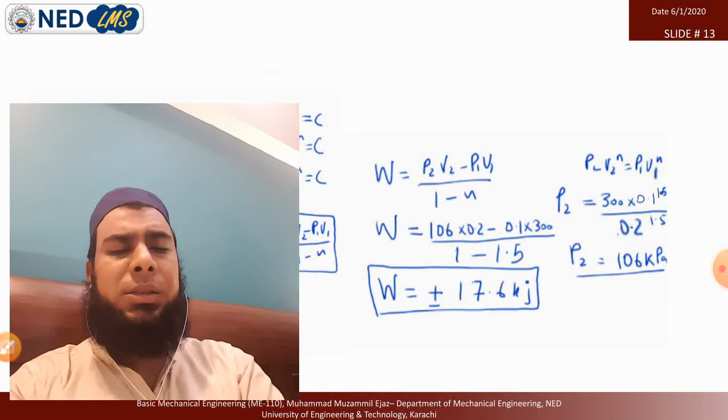In the denominator I wrote v1 and in the numerator I wrote the value of v2, but in the calculator I solved it in the correct manner. That's why I get the correct answer, and we successfully calculated the work, that is positive 17.6. It is positive 17.6. Negatives I just marked in the explanation, and you can see it in the video, so it's not a mistake.

So let's move towards our lecture 11-12. Today we will start with one small topic that is related to the ideal gas equation, and then we will solve one numerical, the last numerical of closed system, and after that we will study open system and then 1 to 2 numericals over there. Then we will move towards the refrigeration cycle.

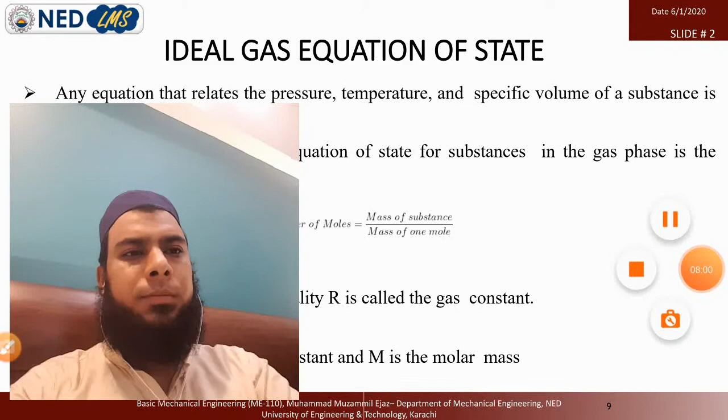Before doing this numerical, we will use the ideal gas equation PV = mRT, but in pre-engineering you studied this equation as PV = nRT. So here is the difference: why we are using PV = mRT and not nRT. We derive this equation in terms of mass. Basically, when we talk about the equation of state, any equation that relates pressure, temperature, and specific volume of a substance is called an equation of state.

We already solved the numericals of the PV^n = C polytropic process. This is also a compression or expansion process. It is also an equation of state, but joining all the properties in a single equation is called the equation of state.

The simplest and best known equation of state for substances in the gas phase is the ideal gas equation of state, PV = nRT. P is pressure, V is volume, n is the amount of gas, whether it is written in number of moles or in mass. Actually, in the below equation it is written as the amount of gas m, that is in kgs. R is the universal gas constant and T is temperature. It is the ideal gas equation and it is used for ideal gas only.

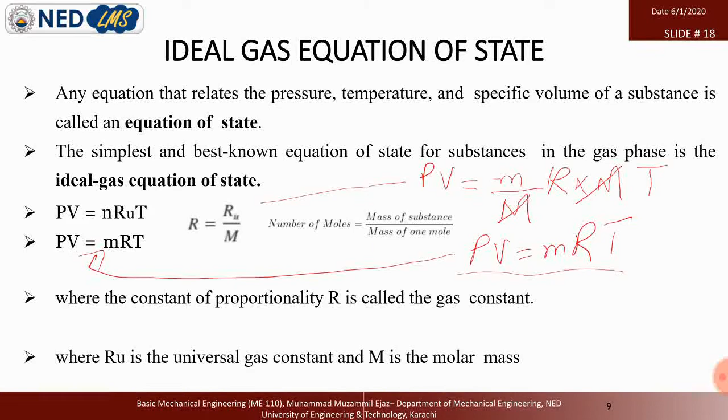So we move on. For the remaining numericals, whether for a closed system or open system, we will use this equation PV = mRT, and we will take the R value from the table for a particular gas, whether it is air, steam, or any other substance like nitrogen. Here R, the constant of proportionality, is called the gas constant, Ru is the universal gas constant, and M is the molar mass. So let's move on towards our numerical.

This is not an example, this is actually question 4.63 from the book of Cengel. You can get this question from the shared book. An insulated piston cylinder device contains 100 liters of air at 400 kilopascal and 25 degrees centigrade. A paddle wheel within the cylinder rotates until 15 kilojoules of work is done on the air while pressure is held constant. Determine the final temperature of air. Neglect any energy stored in the paddle wheel.

So it's a very simple numerical. The paddle wheel rotates. When the paddle wheel rotates, this fan is giving internal energy to the gas inside the cylinder, and due to this the temperature will increase. If the pressure is kept constant, then any energy provided to the system will increase the temperature of the air.

So this numerical, we have to solve this numerical. So we apply the same equation that we have studied for the closed system, that delta E is equal to Q minus W. Let's move towards the next one. So this is the previous numerical. I just move on to the new one.

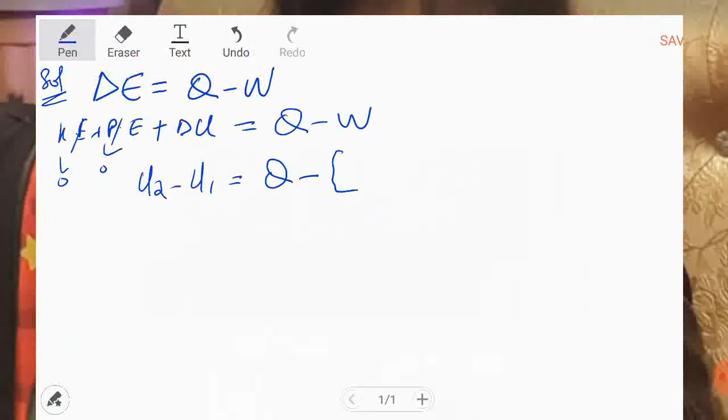so it is from the equation. When the Q is not given, you can get the idea from this point. It is an insulated piston cylinder device, means it is an isolated system. In an isolated system, the heat is not transferring from system to boundary, so there will be no heat transfer, so Q will be 0 in this state. So the Q will be 0, this is 0, and the work is split into two parts. One is work by the wheel, and another one is the pressure volume work.

So work is adding to the system, so anything added to the system, by the sign convention, it is opposite to the heat transfer. So we apply the negative sign. Paddle wheel, we write this with P, work of paddle wheel, it is the sign notation with negative sign. And pressure volume work is done by the system. It is work done by the system, so the sign convention will be opposite to it. So mechanical power we have Wm and positive. So by opening, this will be 0. This minus becomes plus paddle wheel power, and this becomes minus, and it is the work pressure delta V.

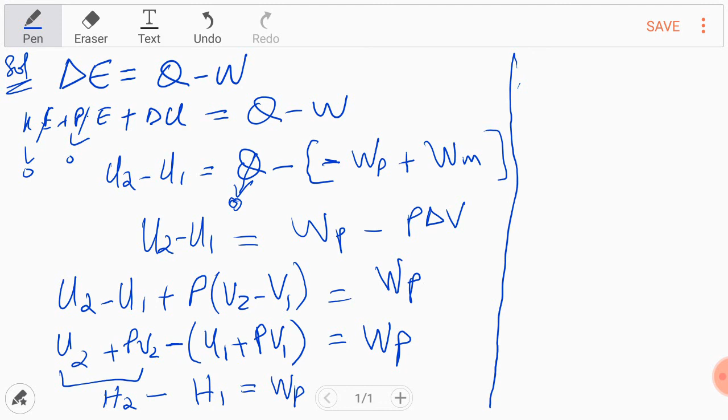internal energy plus pressure volume work is basically enthalpy. It is a combination of internal plus pressure volume work, so it becomes H1, and this is H2 minus H1. Again we can write this in the short form, M H2 minus H1 is equal to work P. So like in the steam we have enthalpy at constant pressure. In this example we have a working fluid here, so we also have a table of air which can give us the value of enthalpy at constant pressure, and in this numerical we have a pressure of

400 kilopascal. So we should write data over here, so we don't shift to the question again and again. So I just recommend you to start with the data. So we will find out H1 at 400 kilopascal, and by this formula we get the value of H2. So we can arrange this like this. M goes to here, and the bracket becomes open, so H2 minus H1 here, so when it goes toward there, it becomes H1.

Now H2. Now we just need to find out: we know the value of Wp is 15 kilojoules, volume 100 liters, so we can convert volume into mass simply by the density. So now we need to find out the mass of the air, and we can get the value of H1 from the SI table of thermodynamics.

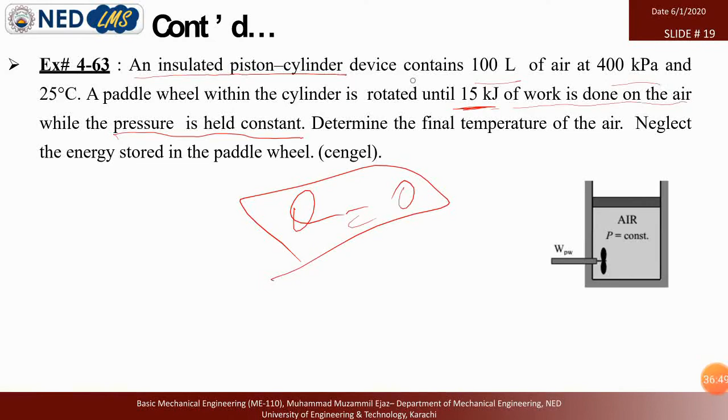So P1 is 400 kilopascal, volume is 100 liter, so we convert to meter cube. 1000 liter is 1 meter cube, so 100 liter becomes 0.1. Simply divide 100 by 1000, you get 0.1 meter cube. And we take the R value from the table, and T1 the numerical tells us, but we use the temperature in Kelvin. It is given 25 degrees centigrade, so 25 plus 273, it's 298 Kelvin.

So now we have to find out the value of R. So we move towards the SI table. From the SI table you can go to table A2. You don't need to memorize these values; in the paper you will be provided these tables. Okay, so here we have the gas air, and the value of R for air is 0.2870. You will see that for different gases you get different R values. So that's why we are using the gas constant, not the universal gas constant.

So again we move on. Mass is constant, so M is equal to P1, 400 kilopascal, we are applying this in kilo form. Okay, and volume is 0.1 meter cube, as I told you, 100 liter is 0.1 meter cube. R value is 0.2870. Now you have a question, why are we using kilopascal over here? Because it will cancel out with the R value. R value is in kilojoules per kg K, so the kilo will be cancelled out and we get the answer in kg.

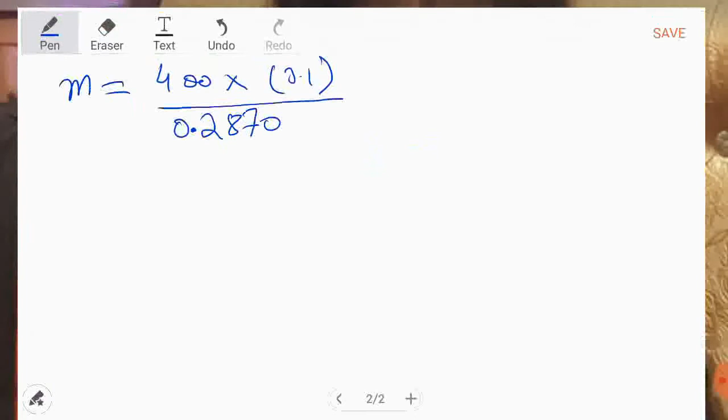If we write the units, kilopascal and kilojoules per kg, they cancel out over here. So to simplify, we are not writing the units over here. And the temperature in Kelvin is 298; 25 degrees centigrade is 298. So we get the value of the mass 0.468 kg.

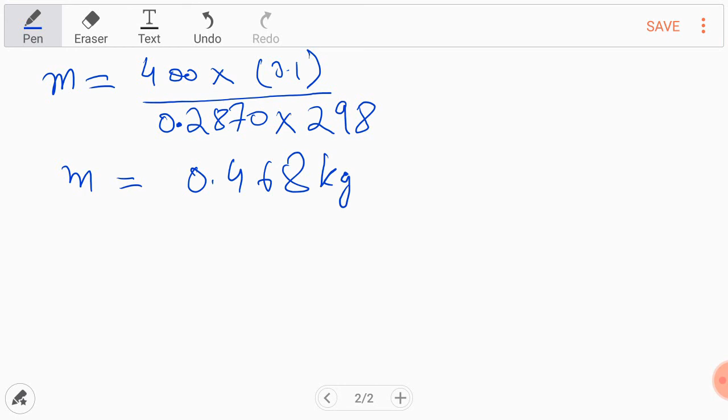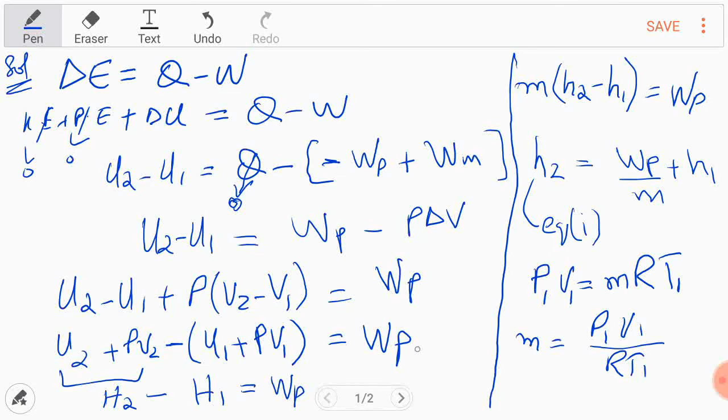Then recalling equation number 1, that is H2 is equal to Wp upon m plus H1. Wp, the paddle work, is 15 kilojoules. So 15 kilojoules divided by mass, that is 0.468, plus H1, and H1 comes from, we can write here, at 400 kilopascal. Now we have to find out H1 at 400 kilopascal at constant pressure. The value of H,

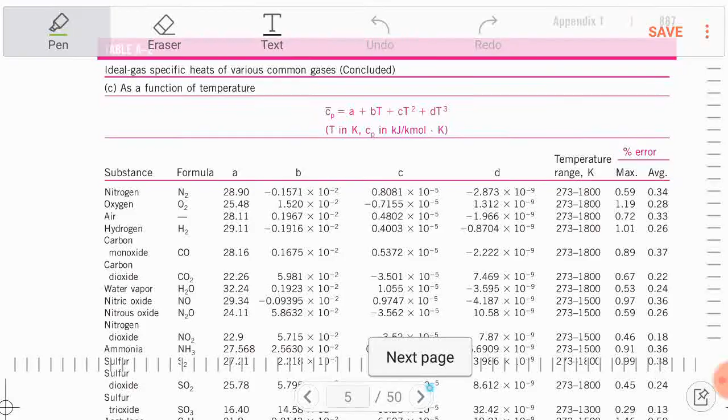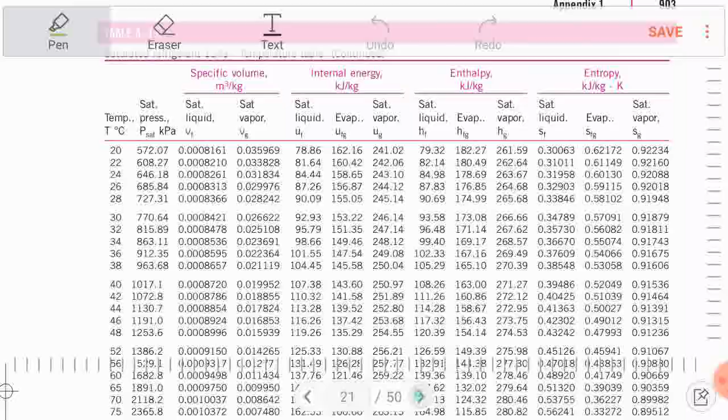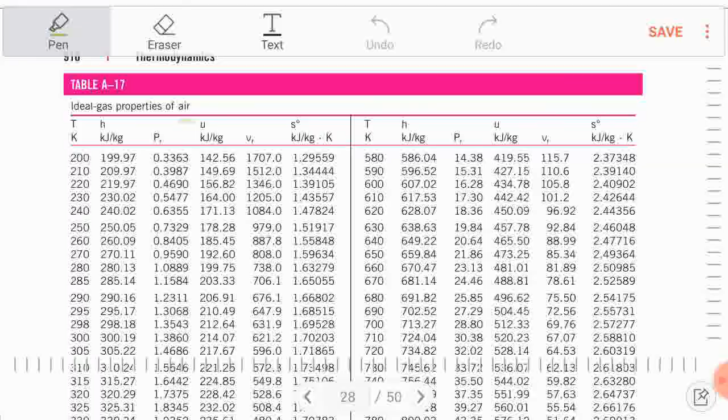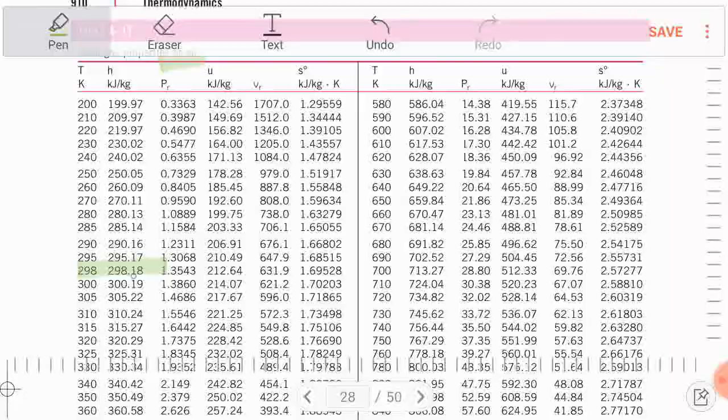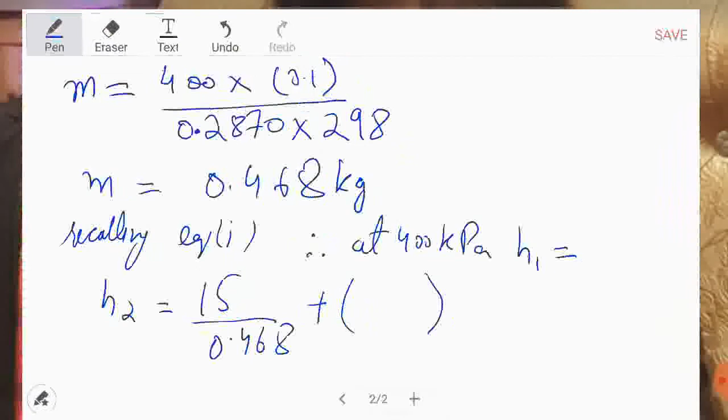We can write over here, not from the pressure table: at 298 Kelvin, H1 is 298.18 from table A17. Yes. So now H1 can be written directly over here, that is 298.18.

Now solving this, we get H2. 15 divided by 0.468 is simply 32.05, plus 298.18. The answer will be 330 kilojoules per kg.

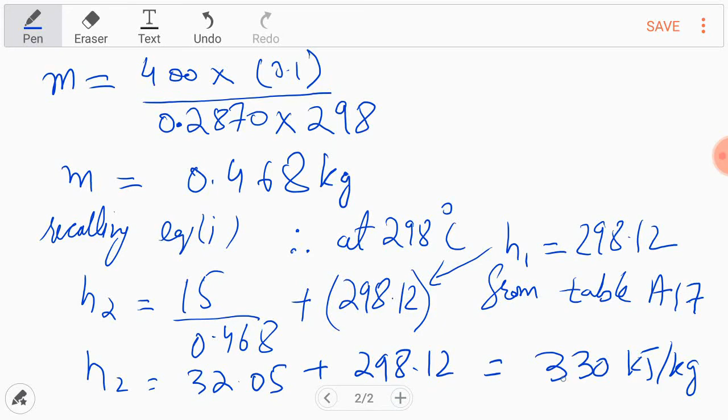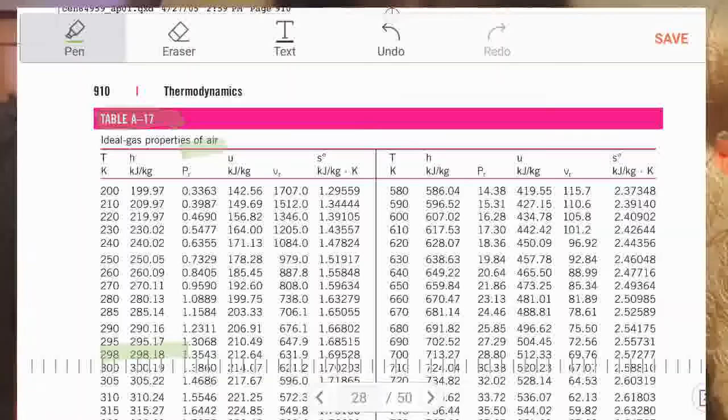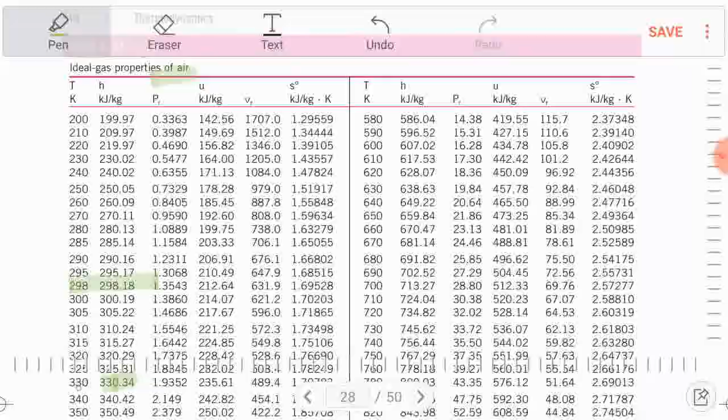Now the question becomes very easy. We get the H2 value, and from the same table A17 at H equal to 330, the T2 is 330. The 330 enthalpy gives the same temperature, 330 Kelvin. It is showing the value of T in Kelvin. And if we convert, 330 minus 273, T2 is 57 degrees centigrade. So this is how we can solve the numerical with the same procedure.